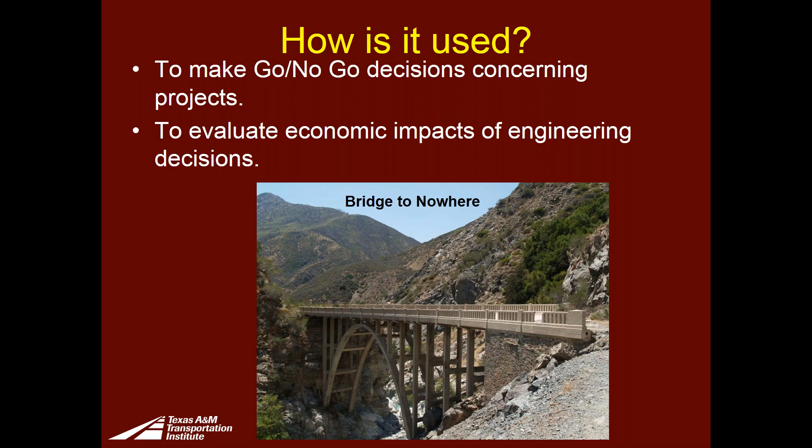And so again, how is it used? It's used to select the most economical choice among alternatives. And it's not always clear cut as to what is the most economical choice. Again, you have to look at it over a period of time and make sure that the structure you're looking at has a use or a life that will encompass both rehabilitation and then, at the end of that, what the reconstruction costs are going to be.

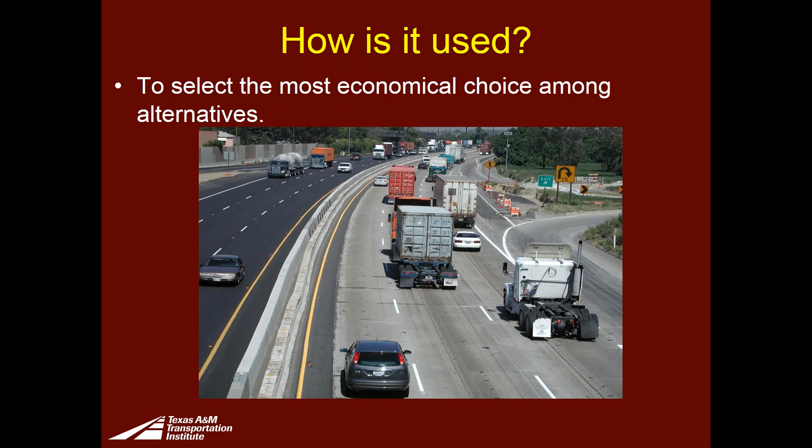It's also used to drive competition in initial bids, and this is something that's done quite a bit. It's called A+B bidding, and basically here the A and B are alternatives. Alternative A in this case has a lower initial cost and higher future rehabilitation cost. Alternate B has the higher initial cost and lower future rehabilitation cost.

And so you take the alternative with the lower initial cost and you add to that the difference between the future rehabilitation costs in order to come up with a comparison in terms of bids that may be submitted for different types of structures.

And it doesn't have to be always just concrete and asphalt. It can be a number of things. You may have different designs that you're comparing. For instance, you may have a stabilized base course in one instance versus an unstabilized base course with a thicker asphalt section on it. There are a lot of different variations of design that can be evaluated.

But in this case, I guess I can say it like this: in A or B, you get what you pay for. Exactly, yeah. But I love that part about lower future rehab costs. Pay for it up front, let's get a good job, and it'll last a long time.

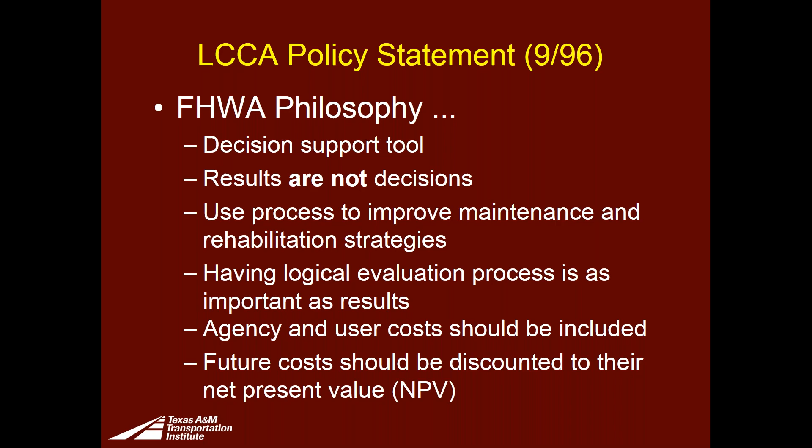rehabilitation and maintenance. You need a logical evaluation process, so if you are going to pursue this type of analysis, you need to have the rules written down ahead of time. The agency and the user costs should be included. As I said, I recommend that the user costs be considered separately, and have some weight in the decision. The future costs should be discounted to their net present value. That is just taking the total of all the costs that you expect over the 45-year analysis period and bringing them back to the present to make comparisons.

So it is an important consideration in all investment decisions. The level of detail should relate to the level of investment. All that means is that the more high profile and the more costly the project, the greater level of detail you want to put into your evaluation. You want long analysis periods, and this is very critical. For pavements, they recommend a minimum of 35 years. For bridges, they recommend a minimum of 75 years.

The reason for having long analysis periods is to make sure that you capture not only the rehabilitation and maintenance costs, but also the reconstruction costs, and that everything is considered in the same way. So if you have one alternative that is going to have a rehabilitation every, say, 15 years, at year 15, year 30, and year 45, you'd have 3 rehabilitations in there, and that keeps the roadway going at pretty much the same level. Whereas if the other alternative has a rehabilitation at 25 years and at, say, 35, and then is reconstructed at 45, you want to make sure that you capture all of that as well.

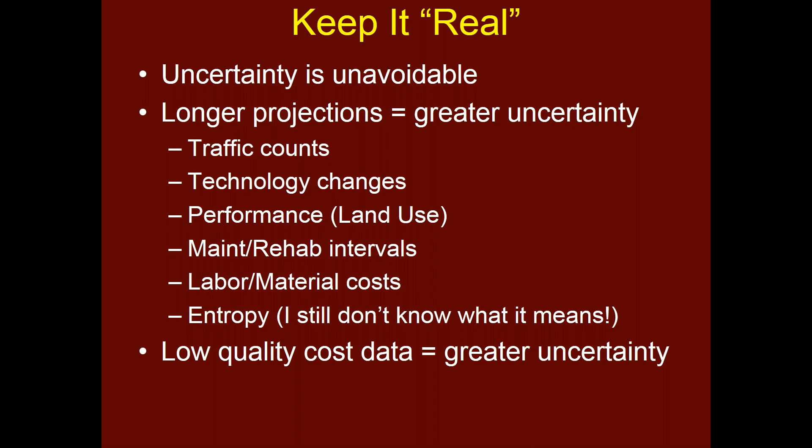Oftentimes when things are done, for instance, with in-house forces in terms of maintenance, the records aren't quite what they should be. And so getting to the exact cost of what that treatment was is difficult. And then further beyond that is understanding how much improvement you got with the maintenance procedure.

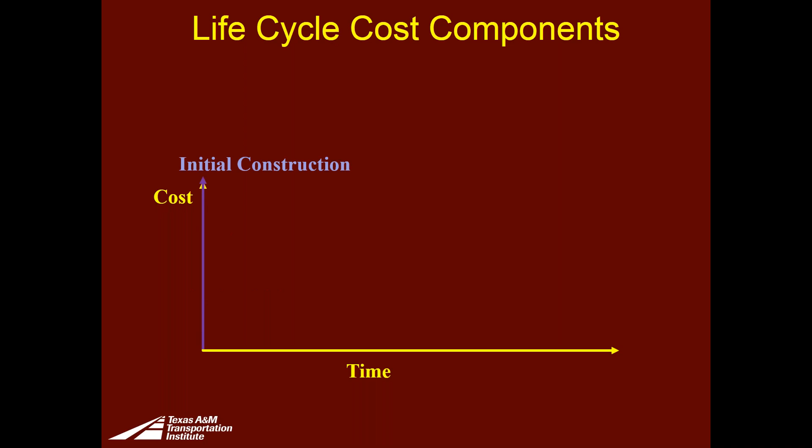So to put this in a visual form, life cycle cost components are this. First off, we have the initial construction, and that is by far the biggest impact that we have on LCCA normally. Then we have maintenance that occurs at certain intervals, and depending upon the maintenance treatment, you either get a longer or shorter period before the next maintenance cycle. But again, for instance, we know that seal coats in Texas generally last somewhere on the order of 7 to 8 years.

So if you're planning on a regular seal coating program, then that's the sort of thing that you put in. However, if you don't seal at 7 or 8 years, if your intervals are more like 10 years or 12 or 15, then you need to be realistic about what you're doing and put those in at the intervals that you're actually using. So this maintenance line here could just be minor stuff like pothole repairs or anything.

Now the rehab could be where we actually come in and repair and maybe do a 1.5 to 2 inch overlay periodically. Or seal coat. Yeah. So you can come in and do, for instance, a shallow mill and fill. There are a lot of different options for rehabilitation. But basically what you're doing there is you have a larger expenditure than you would with a maintenance dollar, but you would do it less frequently. And so you would have that occurring at intervals that would correspond to what your typical rehabilitation program is. I see.

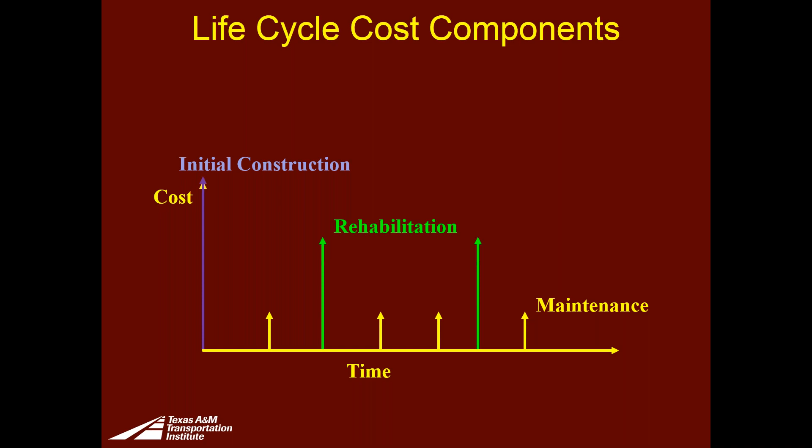And finally, there is what's called salvage value, which is essentially the worth of the project at the end of the analysis period. So the salvage value is the fact that after your last rehabilitation and maintenance activities, you may have something on the other side of it, but you're not going to consider that. And so there is some time left before you're going to hit those, and that is considered in the salvage value of the project. So all of these things, the arrows going up, they're all costs. The arrow going down in salvage value, that is a value. It is an added value.

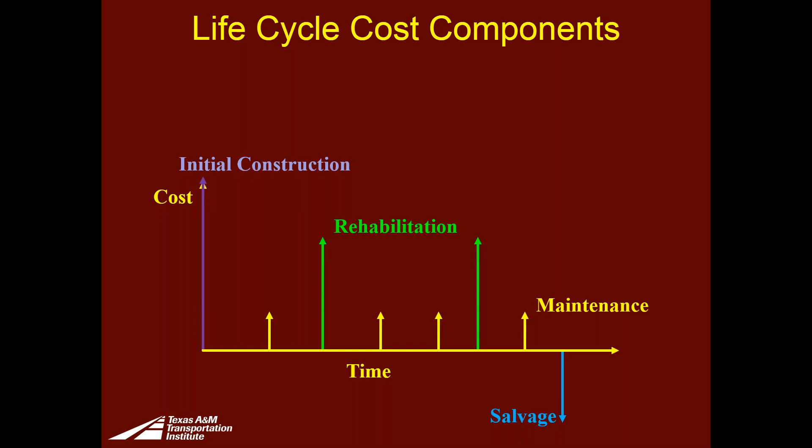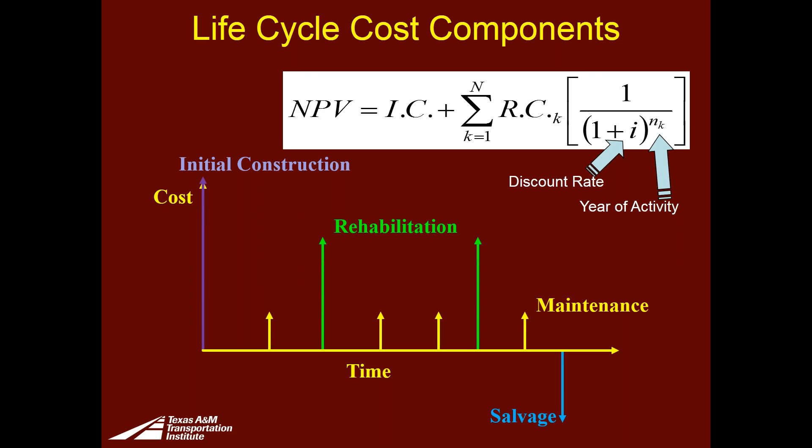And so we have this formula here, which is for net present value. I won't go into the whole detail, but it depends upon the initial cost and the sum of the rehabilitation and maintenance cost, and then you have the discount rate that you're going to apply, and you have the year in which that activity is going to be applied. All of that then goes back into one single value at the beginning of the project called the net present value.

So let's talk in practical terms about some of these issues. The initial cost is normally the most expensive component of the life cycle cost, and so it usually accounts for about 70% or so of the total life cycle cost. And sometimes it can be as high as 80%, sometimes it can be as low as 65%, but it is by far the biggest influence on the life cycle cost. Material, unit prices and quantities, these things are considered into the initial cost along with the labor. Oftentimes they can be considered as part of the material unit prices if you're paying for the material to be delivered and placed. Traffic control, you need to have some concept of the daily and hourly cost for that.

And one of the important things that needs to be pointed out here is that when you're comparing pavement types, you should only consider the mutually exclusive costs. You don't want common costs like landscaping, lighting, all those other things to be included in it. And I've seen sometimes, particularly on airport projects, where not only are the pavement types included in the life cycle cost analysis, but everything from the drainage all the way through to the runway lighting was thrown into the equation. If you do that, you just mask everything. Right. And it really doesn't give you a true picture of the benefit of choosing one pavement structure over another.

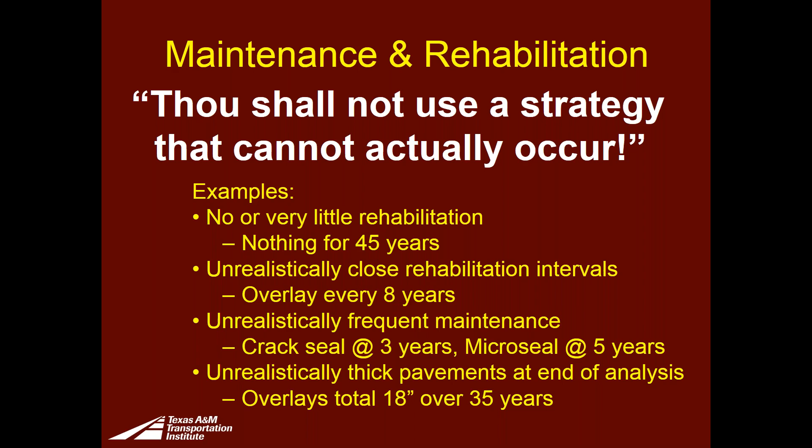Well, again, you need to be realistic about what your expectations are for maintenance and rehabilitation, and also whether or not it would actually occur. There's usually enough information on a roadway system that you can make these kinds of judgments without following an exact schedule that would tend to lump a lot of maintenance and rehabilitation where it's not actually going to occur.

So there's uncertainty in performance as well. If we have our pavement management program set up, we know what we're going to do in terms of restoring the ride quality at different intervals, and in this case, that blue line might show what you might expect out of an average project. If you got a super duper mix and an excellent contractor, which many of them are, and you got great weather conditions or lower loads than you expected, then your performance is going to behave differently.

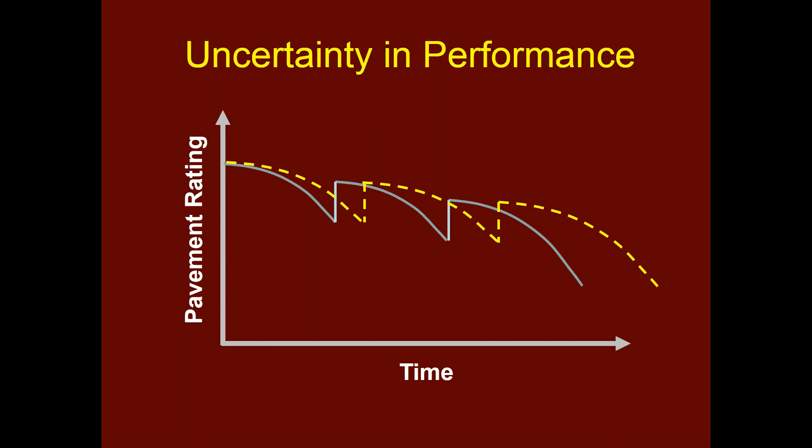And so there is some uncertainty in how the pavement is going to perform over time. And so in doing this, it's good if you can understand what sort of natural variation you have in pavement performance, just to give yourself a little bit of spread in terms of how you go about calculating the life cycle cost.

Discount rate. It took me forever to understand what this is, but it is essentially a way of accounting for the time value of money. It is not the history of commodities cost. So we use the net present value equation to bring future costs back to the present. Again, FHWA recommends using a real discount rate, and this is something that is set by the Office of Management and Budget.

It does not include inflation factors for prices, because the future cost estimates, for instance construction prices, should not include inflation because it's all wrapped up in this number called a discount rate. I see. So it does include the general inflation in the discount rate. And FHWA in the past has recommended a value of about 4%. Most DOTs, I think, are probably somewhere on the order of 3% to maybe 5%.

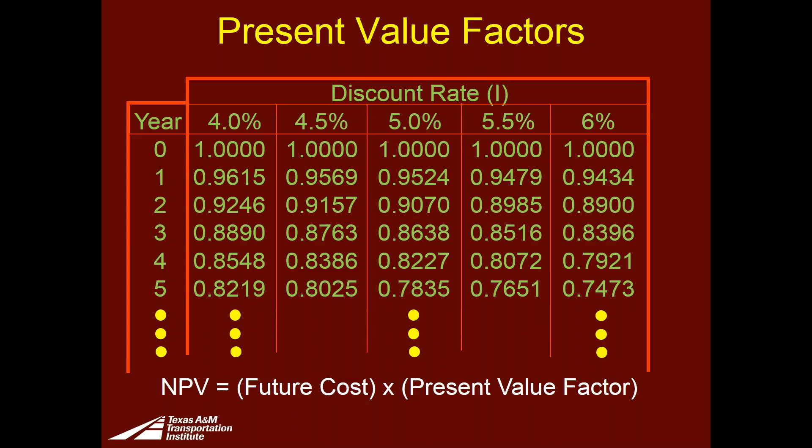And then the net present value is the future cost times the net present value factor. So whatever your maintenance cost is at year 15, you would then multiply the present day cost times the present value factor, and that would give you the net present value for the rehabilitation or for the maintenance.

Now, oftentimes there's an argument made that an economic analysis should be done with material-specific discount rates. First off, there is no definition for a material-specific discount rate. It's not an accepted practice, and as of now, it has not been adopted by any state agency that I'm aware of.

And from the Office of Management and Budget, which basically sets the discount rate, it says, regardless of any assumption about relative prices and cost, all alternatives being compared should be discounted with the same discount rate, following the guidelines in Section 8 of Circular A-94. And Circular A-94 is the document from the Office of Management and Budget, and you can get it online. All you have to do is do a search on Office of Management and Budget Circular A-94, and it will take you right to that publication.

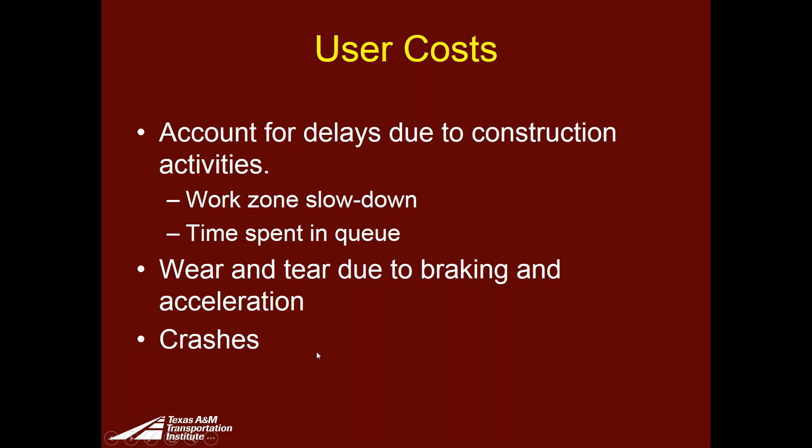User costs, again, account for delays due to construction activities, work zone slowdowns, the time spent in queues. Sometimes they account for crashes and wear and tear due to braking and acceleration. So they encompass a lot of things in terms of vehicles and the cost of doing business.

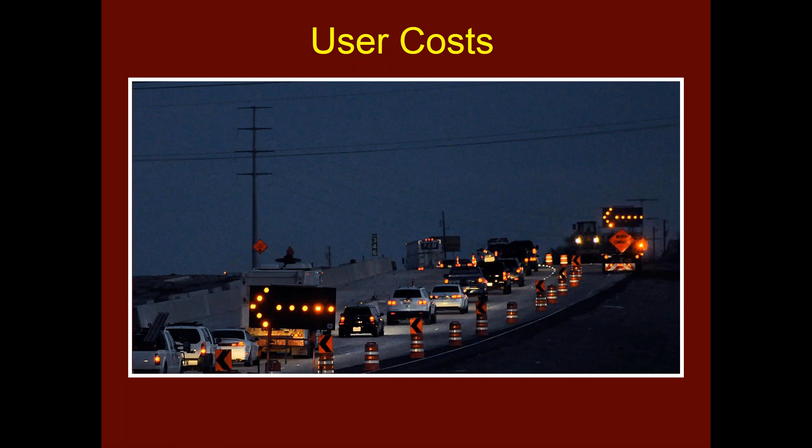And so user costs are important to try to account for, but sometimes when we do the analysis, it can leave you with some unrealistic conditions like an infinite traffic queue, which, if that happens, people normally find a way around. So you have to be careful about how you apply user cost, but it is something that is very real to the people that are sitting there in traffic.

So in summary, the life cycle cost analysis needs to be a part of the overall pavement type selection process. It is not the decision itself. We all need to remember that. Rehabilitation intervals are very important, and real performance data, not guesses, should be used. The discount rate needs to be realistic, and it needs to be applied uniformly across different alternatives.

The user costs are important, but should not be added directly to the agency cost, but they do need to be considered at least as an inconvenience factor. So with that, that pretty well wraps up what I've got for this morning.